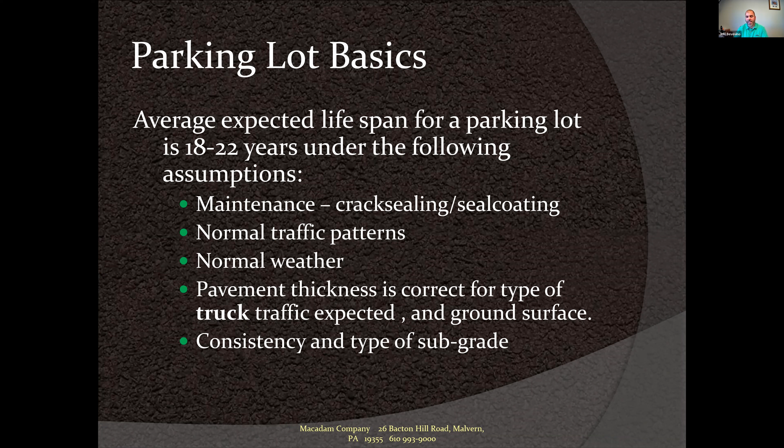And the type of sub base there is, or subgrade, if it's really wet underneath that parking lot, we can tell if there's water perking up through, and that's a huge reason for a lot of failure as well. And we have to correct that before we fix the asphalt.

So actually, I'm going to go into seal coating really quickly because that's the first hot topic of tonight. Why seal? I think everybody knows, especially with an HOA, aesthetics. I know that's a huge part, and you get to touch every one of your residents. I know the residents get on you guys all the time about why aren't we sealing, why aren't we doing this? And I think that's a huge part of it, and it keeps your property value up as well with that curb appeal.

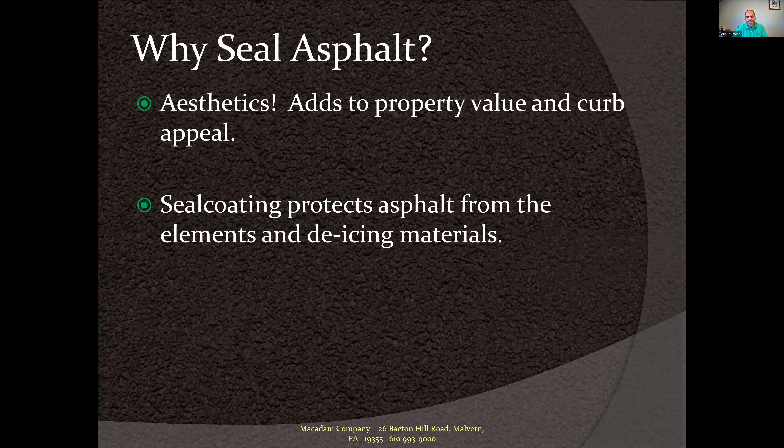So we truly believe, after looking at so many parking lots that I've sealed numerous times, they really do hold up. The number one killer of asphalt is the sun, and it actually breaks down the asphalt cement in the asphalt. Asphalt's 95% stone and 5% asphalt cement, which is the oil. And that's our third hot topic, because the price of oil right now is not great for us.

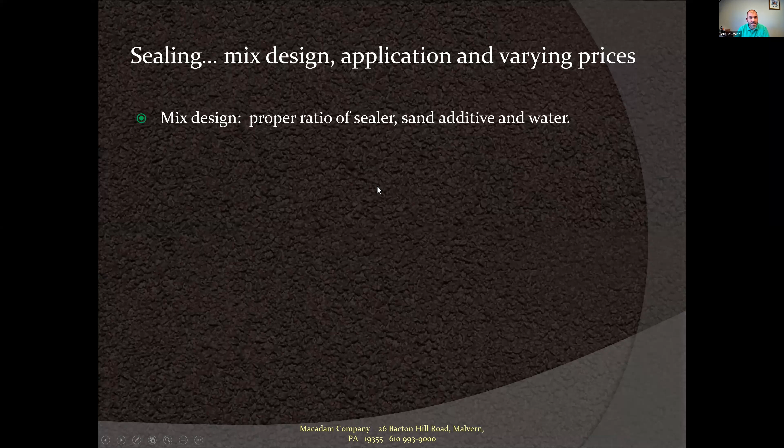I was talking about the sun as one of the leading causes. So here is just a little something about sealer and the mix design of it. For every 100 gallons of sealer, we use 500 pounds of sand. It sounds like a lot, and it is. So when you run your hand across a newly sealed lot, it should feel like sandpaper. If it doesn't, that contractor was not adding the right amount of sand to that sealer. It should be really rough.

And what's good too is those tires tend to stay on top of those sand particles rather than on the asphalt surface, which would wear off the sealer prematurely. And we actually add latex additive, and for every 100 gallons of sealer, there's 20 gallons of water. Sealer is another thing. It's a huge trust factor. We know that, especially at HOAs, no one's testing our material. So how do you know?

We actually sell to about 150 small driveway guys, and they come in and buy sealer from us. We don't tell them how to mix it. It's up to them. They tell us how much water and how much sand they want in their tank. So I know from experience, watching those guys out back, sealer even more than blacktop and asphalt paving is a huge trust factor. And I think that goes a long way.

In the application, we normally apply when we can with a bar, and I'll show you a picture of that really quick here too. And this is the coverage rate, kind of boring stuff, 0.24 gallons per square yard. We normally put 2 coats on asphalt, and driveways get one coat by a squeegee broom, and that's a typical specification. And when should you seal coat? Every 3 to 5 years.

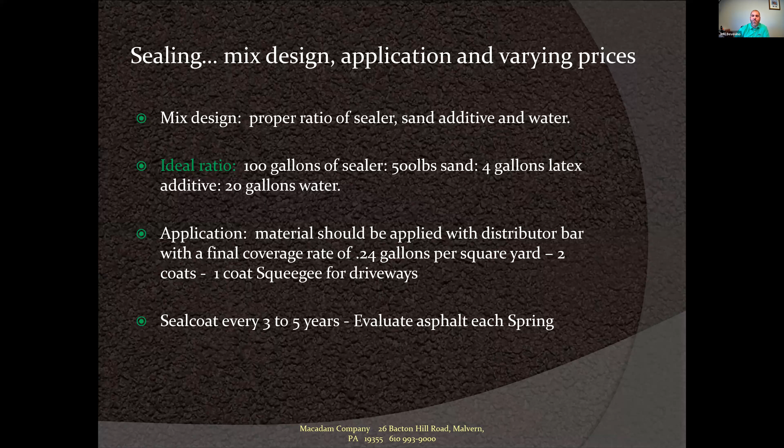Any questions so far, anybody? No, we had a question that came in prior to this presentation, Jeff, about when asphalt is done, how soon after that can seal coating be applied? Oh, after the parking lot gets installed, thanks, Lorraine. I would say most reserve studies probably say about 3 years. We like to wait about 5.

But along with that 5-year plan, I know the reserve studies follow that exactly. I think that's just a guide, not an exact science. So I like to look at those parking lots every spring and see, hey, it might be 4 years and those stones are starting to ravel out some. Well, then I'm going to say it's not 5 years, it'll be 4 years. But 5 years is about the right time, I think.

And then, I think this is a big part. Seal coating is a preservative coating, not a structural repair. You'll still see your cracks come up through. You're still going to see the old lines come up through. So sealer is just a coating and it's nothing more than that.

Jeff, we did get one more question that came in. Bill, if you want to talk after I read this to Jeff, you're welcome to. Bill asked about their HOA owning the streets. Do these guidelines apply to the streets as well as to the parking lots?

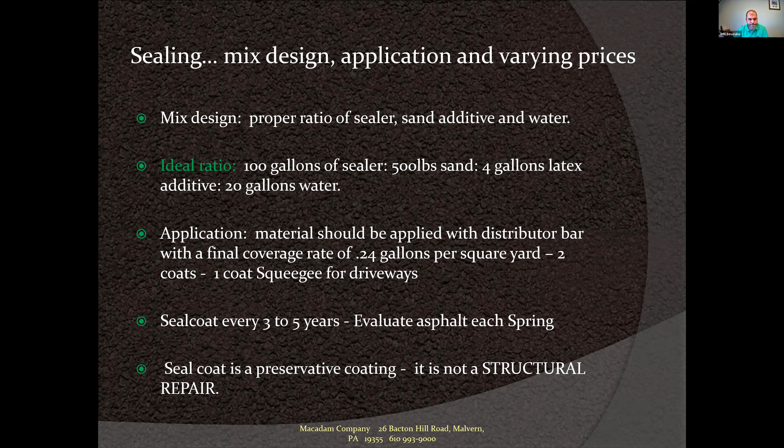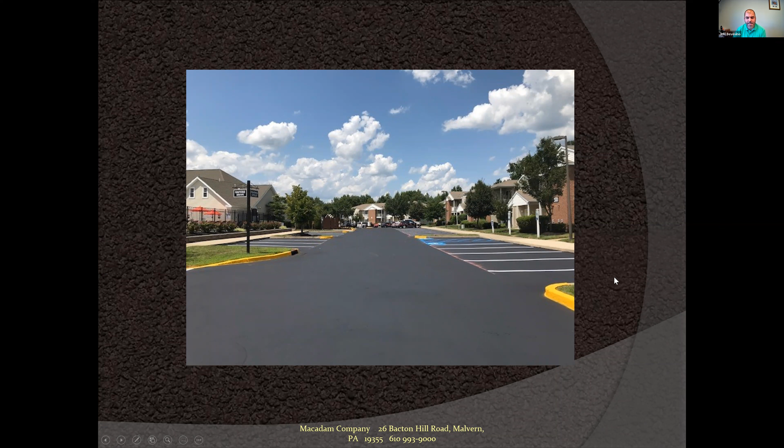And here I think this is a homeowner association. You see the new lines, and this red here is a chalk line. When our guys line stripe, that's what they used to snap those lines out. Now we are using lasers finally, so you won't see any chalk on your parking lots, and it's much faster. It's actually great for us. We're finally getting some technology in our business. Newly sealed lot here.

So this is the first one I'm going to get to here, asphalt versus coal tar emulsion sealer. We used coal tar forever. I'm a little worried about it, because I was a seal coating foreman for a long time, and we wore masks when we sprayed, but coal tar has high VOCs and poly, I don't even know all the terminology for it, but it's being banned in a few states now. It's still legal in Pennsylvania, and it all kind of stems back to an article in the USA Today.

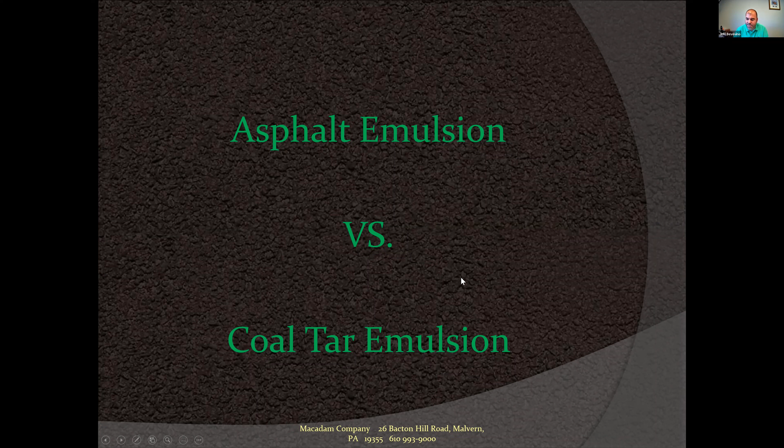It was 2013, and we've had so many residents come up to us over the years and say, are you applying coal tar? A lot of contractors still do it. We made the decision not to apply coal tar on any residential property anymore. So we use an asphalt-based emulsion sealer. We've experimented with it for 10 years and tried all kinds of different products. In the last 3 years, we think we finally found one, and we still give a 2-year warranty on all our seal coating.

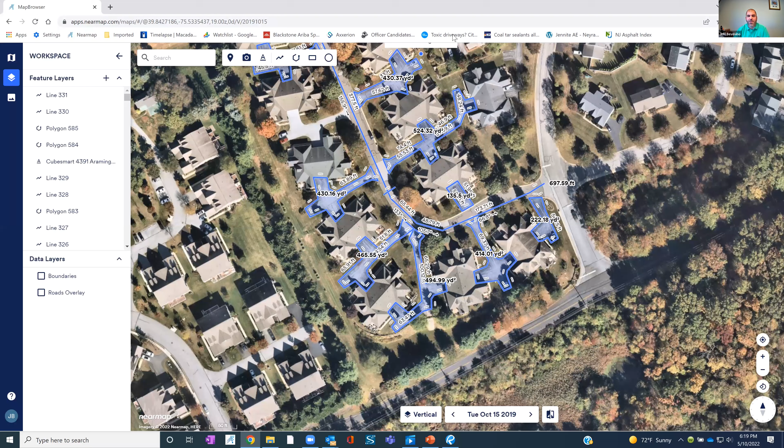There was one article, and you can find it if you search USA Today coal tar sealer, and back then we thought we were going to be in some trouble. When this article first came out, we had all kinds of issues. And so I actually follow this, and there was just an article written this year in Virginia. This was February. They actually struck it down, which I'm shocked by, because coal tar.

So what happens is, if you think about sealer, we put down I think 450,000 gallons of sealer last year. So we say seal every 3 to 5 years. Where does all that sealer go? 450,000 gallons. Where's all that sealer going after it wears off? It turns into dust. It breaks down, goes in our waterways.

And this USA Today article actually says those dust particles were trapped inside people's homes, and that's a carcinogen. And then it really goes from there. I think that we're staying ahead of it by using asphalt. And so this is the product that we're using. So you can search all these different things on here. USA Today, coal tar sealer, that one was the big one.

So we're using our product made by Neyra. They're a #1 supplier for sealer. They're in Ohio. It's more expensive, about 20% more expensive actually than coal tar. But we like to use this. It's an asphalt emulsion sealer. And actually we get the warranty from the manufacturer, which is huge. So if you say it's wearing off in 2 years, we could go back to our supplier, and that's a big thing.

Just a little bit of a lag here.

So I'm just talking about the USA Today article from 2013. Another big plus about asphalt sealer, which I like, is that it's low in odor. When I drive around and I smell that coal tar smell, I always pull a U-turn because I know one of my competitors is probably putting it down somewhere. I can smell it from 2 miles away and find it. People don't like that smell, and I don't either. So with your residents, keeping the masses quiet and appeased, I think that's a huge part of using asphalt-based sealer.

And it's still derived from petroleum. I can't tell you how it's made or anything. I just know that it's much more safe, lower VOCs, lower PAHs. But as I said, we still warranty it for 2 years. So it's been a 10-year long learning process for us, and I think that we finally found a really decent product to use. I think it's extremely beneficial. It is a little bit more expensive.

Are we still using coal tar? We are on some distribution centers where we can, but here it is. New York and Maine have full state bans in 2023. In most of Maryland it is banned. It is not a statewide ban, but it is up to local municipalities. I know Washington, D.C. is banned and all of California right now. I think it's important to stay ahead of that curve. Does anybody have any questions regarding this?

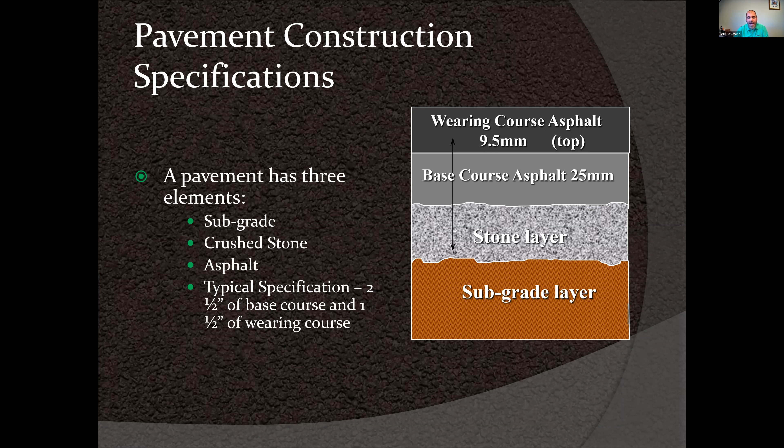So what we like to do, and this is a huge part of evaluating your lot when it gets to that 15-year mark, is to look at your parking lot. When you start to see failure on it, spider cracking, once you see that spider cracking happen, if we time that right, we can just mill off 2 inches of asphalt instead of the 4.

So I think most of your reserve studies are going to probably err on the side of caution again, and actually say 4 inches. But by doing 2 inches, if your reserve is going to say $500,000 to replace your parking lot, we can probably do it for about 260,000, almost half.

And is it as good as replacing? Is it as strong as replacing all 4 inches? We can argue that either way, actually. But I think it gets you 95% of the way there. And the benefit is, no one knows any different. It looks great. No one knows if you milled off or replaced 4 inches of asphalt.

So I think this is a huge one. I love going in, and I'm always the bearer of good news on this one with boards. I feel like, hey, you don't have to spend that amount of money as long as you do it in the next 2 to 3 years, because if you let it go, once that wearing course completely breaks down, then that deterioration reflects back onto the base asphalt rather quickly too.

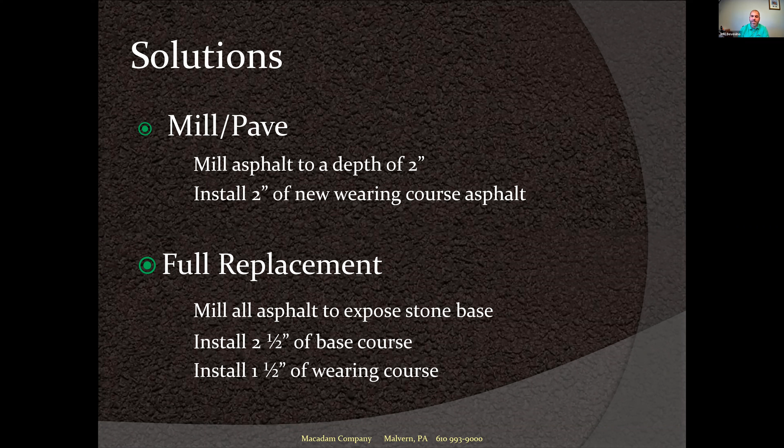And then once you have that fail, then you have to replace all 4 inches. And as we know right now, going back to my first point, oil is expensive, so we want to do whatever we can to minimize the amount of material that we are putting back down.

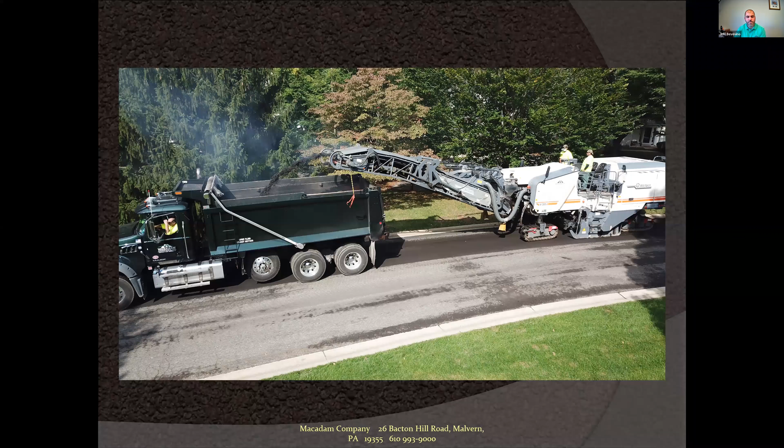And this is a picture of us 2-inch milling and paving. This is an HOA. Actually, this is in Glen Mills. This is this job here. If you can see, it's milling and paving. So this was a full 2-inch mill and pave. We did this job.

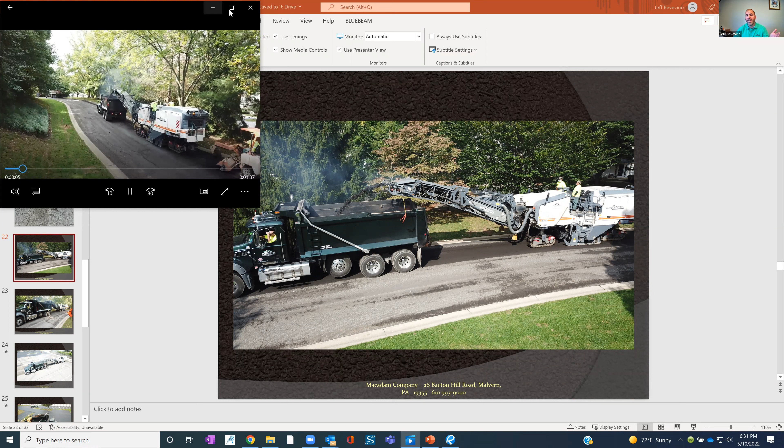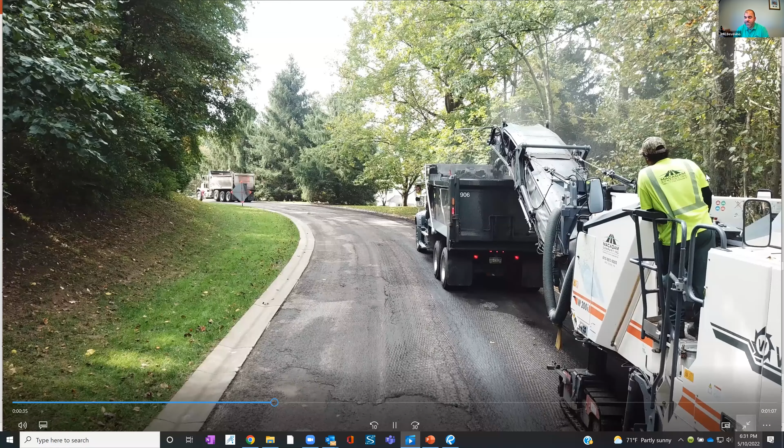We did this ring road. This was about a mile-long ring road that we did here 5 years ago, and 2-inch mill and pave. And so there are no cracks on that road. So going back to the original point, 18 to 22 years, this one might even last longer. I don't see one crack on this newly paved road right here, which is kind of justification for just doing a 2-inch mill pave job instead of 4-inch mill.

Anybody have any questions? Yeah, Erica just had a question about your role in coordinating with the residents when you do these big projects, whether it's the asphalt or the seal coating or anything. My specific role? Just Macadam's role as a company.

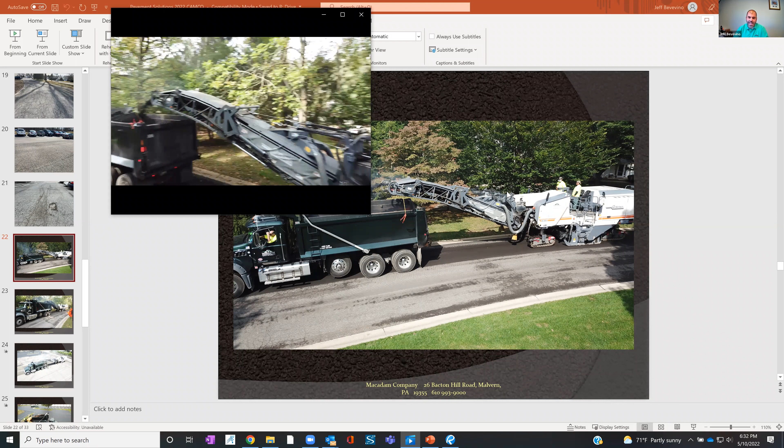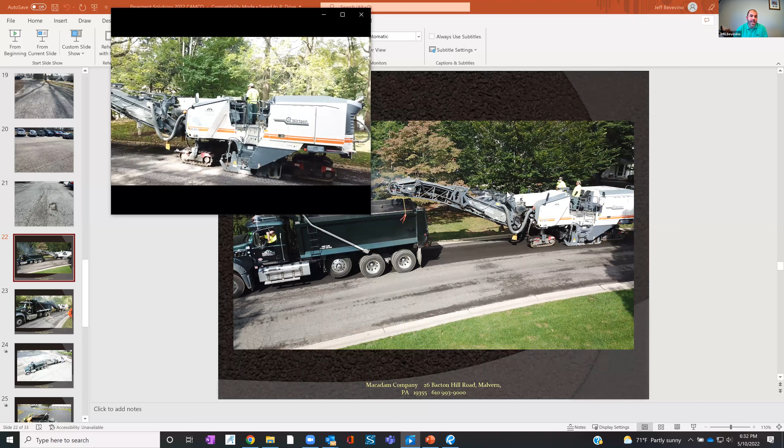I guess as far as seal coating, we'll send a sample letter out to the individual manager, and then the manager usually email blasts, I believe now, I think it's mostly email. And then we actually come up with a sketch and break up that property over a certain amount of days, however we think it's going to work for the amount of residents that live there. So if it's a 5-day seal coating job, we'll actually break it up over 5 days.

And then we'll put up signs on barricades a day or 2 ahead of time on each section, just to remind residents that, hey, May 17th, we are going to be doing this area. Please have your cars out 7 to 5, something like that. And actually going back to that, paving is easier than sealer as far as residents go. Sealing jobs, you have to stay off it overnight. So we have to close off those parking lots overnight. Paving jobs, most of the time, we can open them up at the end of the day.

Since we do our own work, we will line stripe on top of our brand new paving at the end of the day. And our guys try to get out of there about 5 or 5:30, and we'll actually open up that parking lot. Did that answer your question?

Yeah, Erica, feel free to talk directly if you'd like. No, that's great, Jeff. Thanks.

Because it's important for us as managers. Sometimes we can't convey the information enough to the residents to make sure it happens perfectly. And sometimes you get a straggler vehicle that stays when you're trying to pave the parking. And the fact that you guys put up cones and signs, that kind of thing is very helpful and good to know. And it helps us out like crazy too, because residents have their cars there and our guys are waiting. And as you know, labor rates have gone up like crazy right now too. So we're doing whatever we can to minimize our costs.

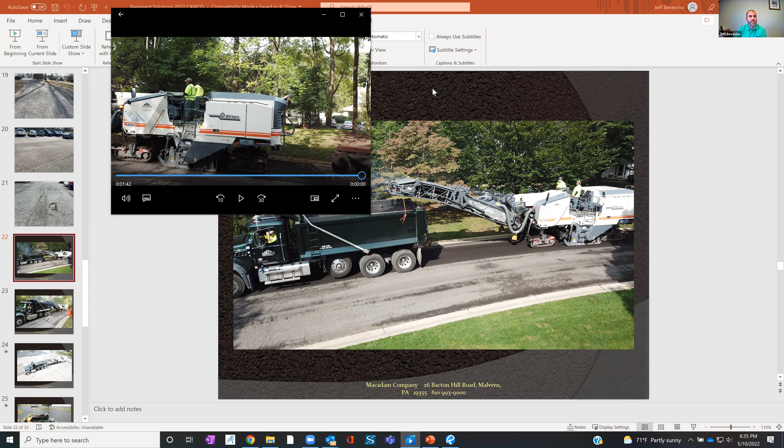Jeff, we do have another question that came in from Ed asking about how you dispose of the material you mill and if it can be recycled. So funny thing is that we just met with our suppliers. We do a lot of work in New Jersey. So we're the #1 supplier in New Jersey, Tilcon, and they're sitting on, I forget the number, but it was in the millions of tons of millings. It's actually kind of sad. Everyone likes to see everything being recycled today, and we want to see it as well.

What happens is, the oils in asphalt are really only meant to be heated one time. When we order asphalt, we order it the day before, and we go up to the asphalt plant and they make it as needed. They have this huge burn, they add the oil, the stone, the screenings, and they make the asphalt for every batch. So that oil is burnt once, it's up to 450 degrees, I think, and we put it down. When you recycle that material, they tried to recycle more about 15 years ago. They really tried to use more in our asphalt. We ended up staying away from the asphalt plants that used too much recycled material because the material wasn't as good.

And then it's a shame, but within our product at the end of it, you could see it raveling out. It would be dry, hard to explain. It just looks dry and it ravels out quick. And I can tell actually now that they are starting to use a little bit more recycled product because they are sitting on so much recycled, so many millings.

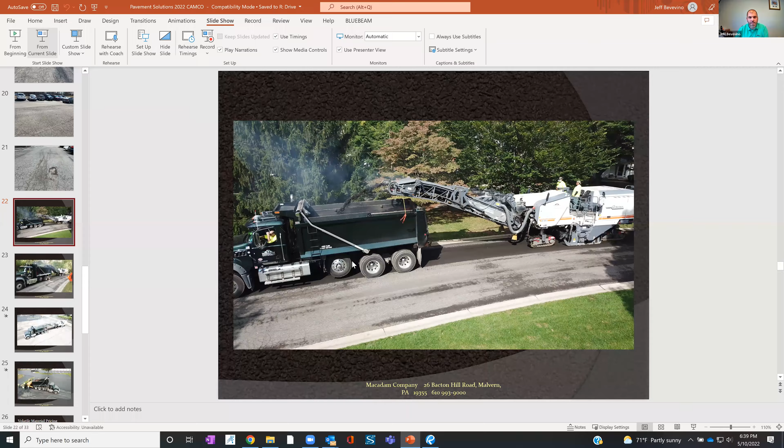Couple more pictures of milling and paving. Another 2-inch mill and pave job there. So this gets us to the last topic, the asphalt index. The material pricing today is becoming a huge issue for us. It's kind of like in 2008, when oil skyrocketed, we really had issues. We had some homeowner associations backing out of bigger paving jobs.

Driveways is a lot of labor, but when you have a huge parking lot, the material is more than 50% of our price. So when you have a 25% material increase in 2 months, people start thinking about it. But is this the end? Is this the new norm? We don't know that. Is it ever going to come back down? Is it going to be more? It actually may be more.

Diesel fuel is $6.50 a gallon right now, and our dump trucks get 4 miles to the gallon. So when you have a large paving job and you have 6 dump trucks on that lot, it's important to be close to the asphalt plant. It's important to be close to our shop. There's all kinds of different factors, and it's a huge thing with us right now. It makes us nervous, so again, it's so important to catch your parking lot. If you can mill off 2 inches and not 4, that's the critical point here. I think that's the largest one.

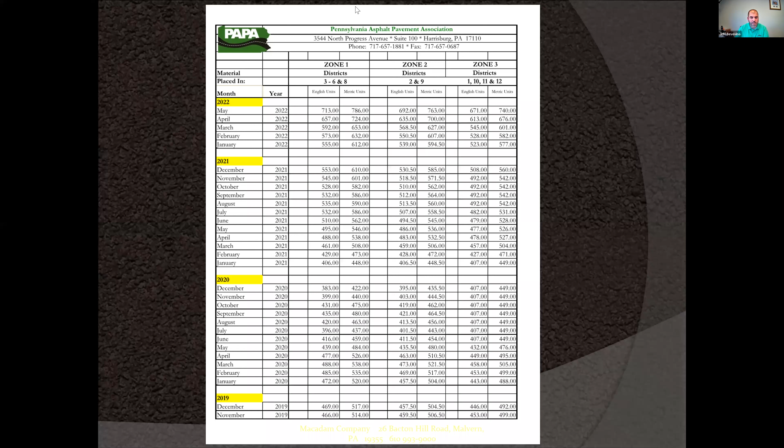And if you wanted to see the Jersey index, which is the same as the Pennsylvania index, anybody can go online and look at this. This is through the state. So just here is north of 195. It's always about the same. Lost my screen. Lost my bookmark. There it is.

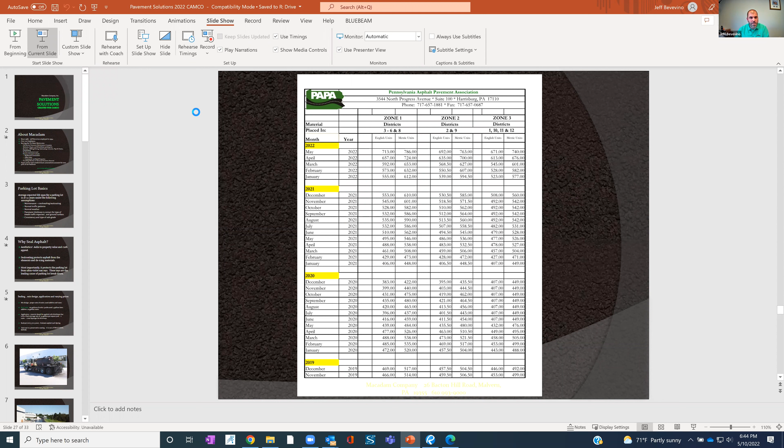So does anyone have any questions about blacktop? I just want to touch on concrete. I know we don't have much time left. Does anyone have any questions on blacktop? Am I boring everybody? Coming through the chat right now. Pardon me? Things coming through the chat right now. Wait, here comes one. Sorry, I spoke too soon.

William has a question. How involved are you with engineering firms in the seal coating and paving process? So we are friendly with a bunch of engineers. There's a few that I recommend. There's a few that don't want to use us because I tend to disagree, because I feel like sometimes it's good to butt heads and then come to a mutual agreement.

I think that engineers most of the time, which I get where they're coming from, always err on the side of caution. And so I like to have the other side, of going, I know that you don't have deep pockets like a township does, and you can't go to crazy specifications. But we do work with quite a few engineers. And I know that we're recommended by a bunch as well, especially in the homeowner association world, because we try to just kind of keep prices down on things.

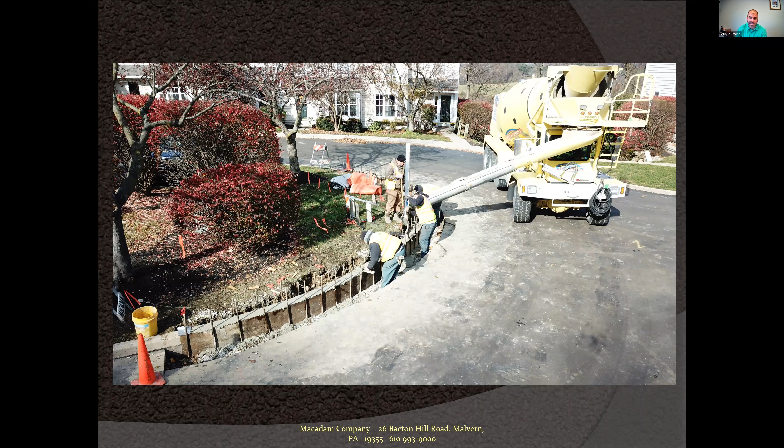But that's how I go about it, just because curbing is so expensive. If we think we can get it out to the next paving, in another 20 years, I really try to push for it. Here's some more concrete curb pictures just to see how intense it is. And here's a depressed curb that was actually installed. Our concrete curb crew put in the base asphalt first, and it's actually lower than that wearing course. And then we'll come back in and mill off that roadway and then put that wearing course back in. So any other questions on concrete?

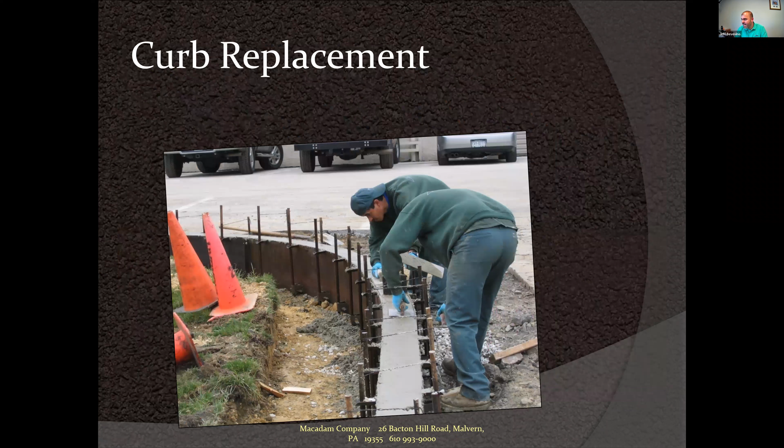Yeah, there's another question that came in. What is overblessing? Oh, I just want to get back to that. Where did I have that? Oh yeah, here it is. So these are just a few things I wanted to touch on overall concrete. So this is such a hot spot right here, overblessing.

So the housing boom in the early 2000s created so much work. We don't do any new construction. So GCs were hiring companies, and guys that didn't really know how to install concrete were doing concrete work. So what happens is there's a chemical reaction when concrete sets up. It's hot, and guys will pour too much concrete all at once. So you have to screed that concrete in, install it, and then you have to have guys fall back and finish it.

So what happens is if you install too much concrete at one time, you start losing it, and it starts getting hot, and you can't get a mag finish on it, like a broom finish. So guys, I'm sure you've seen it, they have a paintbrush and a bucket of water, and they put that paintbrush in the bucket of water, and they actually put a little bit of water on top of that concrete, which we do, but it creates a thin film.

But if you put too much of that water on top, and sometimes you have to if you're losing your concrete, that creates a thin film on top, and it looks great at first. So you don't know, and this is like another trust factor. You don't know at first, oh wow, thanks for that job. And 2 years later, you'll see that whole top spalling, just flaking off.

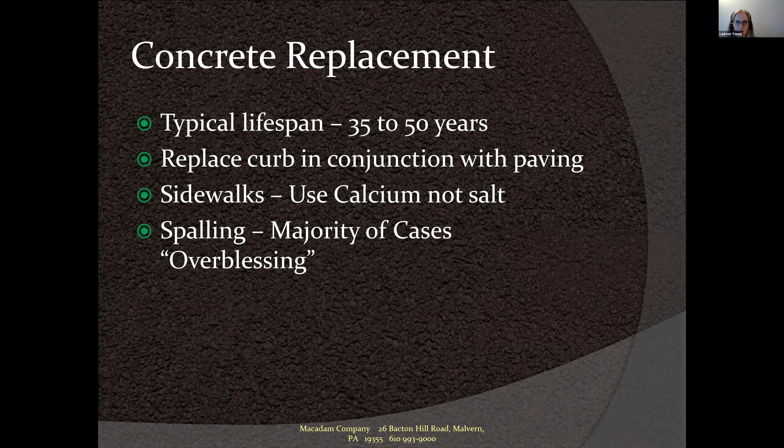So one more question. Can we jump back to the curbs and the asphalt? Someone wanted a clarification on the curbs you mentioned being replaced, even if it looks like they might last 5 more years or something like that. Can you explain that one more time?

So we did not replace that one, but I'll look through the site and I'll look to see if we should replace those drain tops and how much curb has to be replaced. Most of the time, I'll see curbs along like a radius of a cul-de-sac. They tend to get hammered the most because those plows come around and they really bang the hell out of that curb. And that tends to be cracked the worst, and normally we're replacing that.

But a lot of times too, there'll be paving jobs where we will not have to replace any curbs. They're all in good shape, or there might just be a little piece here and there. But the average curb replacement on a 22-year-old parking lot is probably, I'm going to say, 100 to 300 feet. So if you want to use a unit number, $90 to $100 a foot.